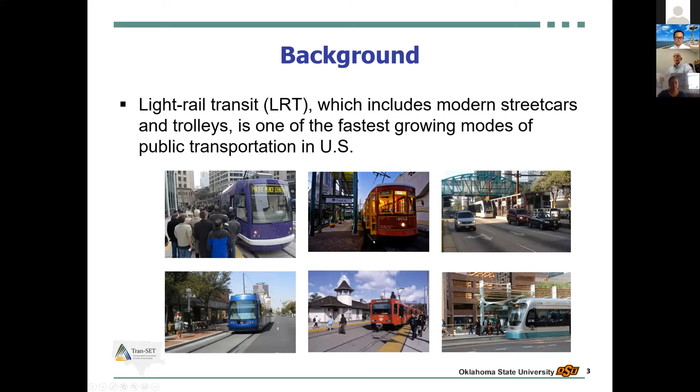The majority of light rail transit systems are fitted to existing corridors, urban or suburban corridors. By a corridor, I mean the right-of-way, say a street or a highway. So you take part of that roadway and allocate it for the light rail. That makes it very easy to introduce light rail. That's why they are very popular. You don't have to construct new rights-of-way, just a slight modification of existing rights-of-way.

The disadvantage is that the right-of-way will be shared most of the time, meaning more conflicts between the light rail vehicle, pedestrians, and other automobiles. You can have light rail in a semi-exclusive right-of-way, say with barriers that separate the light rail right-of-way from other users. But the majority are in shared right-of-way.

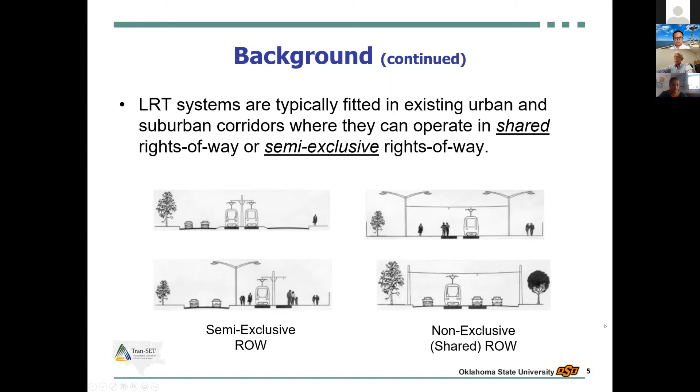The term VRUs, or vulnerable road users, refers to those most at risk in road traffic. Typically, pedestrians, cyclists, and electric scooter riders. Of course, there are motorcyclists as well. All of those are unprotected by an outside shield. If you are in your car, the body of the car protects the passengers and the driver. VRUs don't have that type of protection. In 2009, the World Health Organization reported that half of the 1.2 million transportation-related fatalities occurring each year concern vulnerable road users.

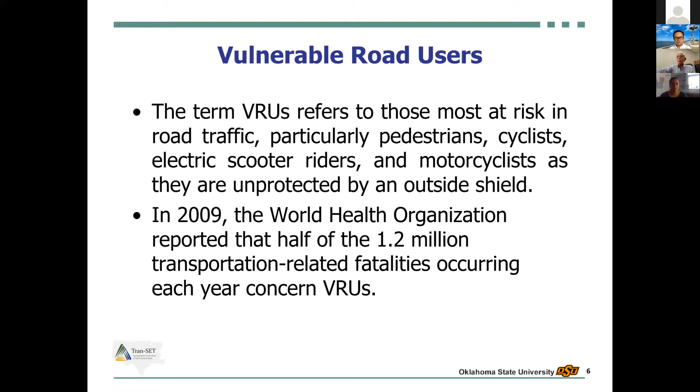VRUs are heterogeneous groups. We don't have one group we call VRUs. There are several groups that fit into what we call VRUs, okay? And these groups differ in their characteristics, travel habits, and behavioral patterns.

Among all VRU groups, the elderly, the disabled, and the children are more vulnerable than others because they display a certain amount of task incapability. For example, the elderly's walking speed is low, same thing for children. The elderly can't move their head right and left easily, okay?

Children are not aware of the risks involved, so they can engage in risky behaviors or actions. The disabled, of course, it's clear that they can't move fast, and they have to utilize certain devices in order to be able to navigate.

The motivation of this work is that operating light rail vehicles, which we are going to call LRV. LRT is light rail transit, LRV will be light rail vehicle. Operating light rail vehicles along shared or semi-exclusive rights-of-way introduces conflicts and increases the risk of collisions with vulnerable road users. These here are examples of, say here, just trespassing on the right-of-way for the light rail.

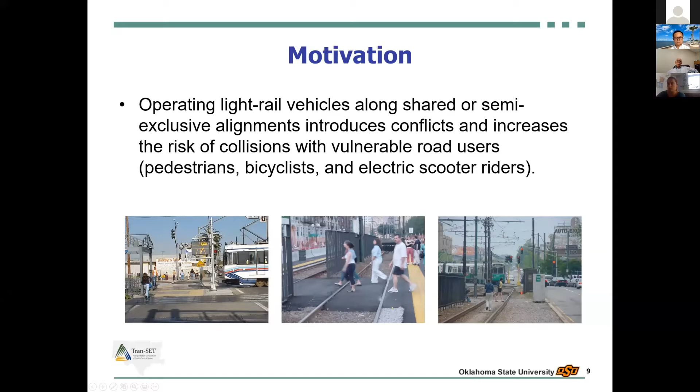Reducing collisions with vulnerable road users has been identified by FTA as the second item of their top 10 safety action items for improving rail transit safety. To develop effective safety treatments for VRUs, we have to understand the behavior of pedestrians, cyclists, and scooter riders along LRT alignments.

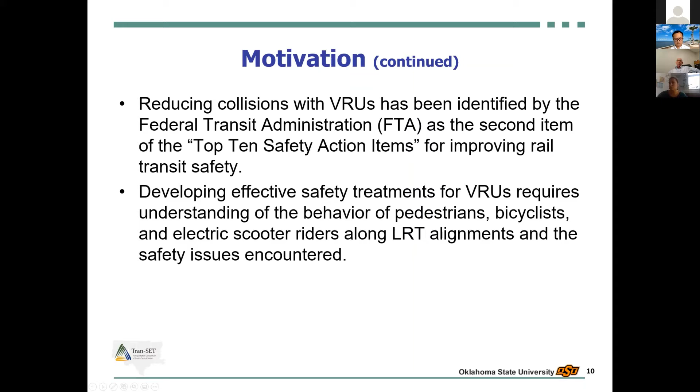The project involved surveying or evaluating the existing body of knowledge, synthesis of this information, and putting it in what we call a best practices resource guide and an accompanying PowerPoint training material. These materials will be used by light rail agencies. Okay, they can use it, say, in fairs, in schools, presentations at stations.

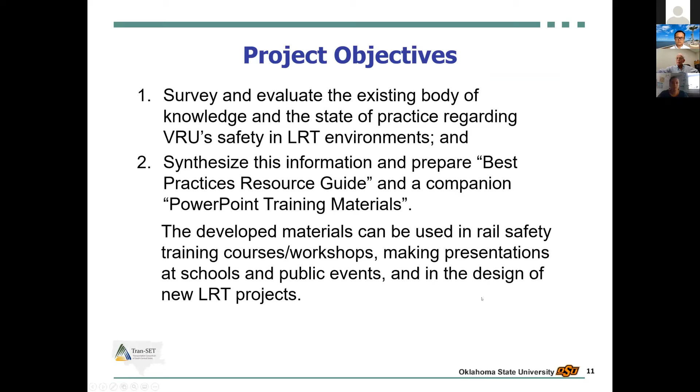They can use this information to educate and make the public aware of the risks that exist in light rail environments. They can also be used to train new employees coming to join the workforce in light rail. There were 8 tasks. All those tasks have already been accomplished. Right now, I am in the implementation phase, which is task 8.

For TCRP Report 17: trespassing, jaywalking, station and/or cross-street access. Report 69 lists limited sight distance at pedestrian crossings because of walls, devices, etc., and pedestrians darting across the tracks without looking.

Report 137, which had to do with audible devices, talks about inattention, confusion about the meaning of control devices, lack of appropriate physical separation between vulnerable road users and the light rail vehicle, risky behavior by pedestrians, lack of respect for controls, and operator error sometimes, or lack of information to the operator of the light rail vehicle.

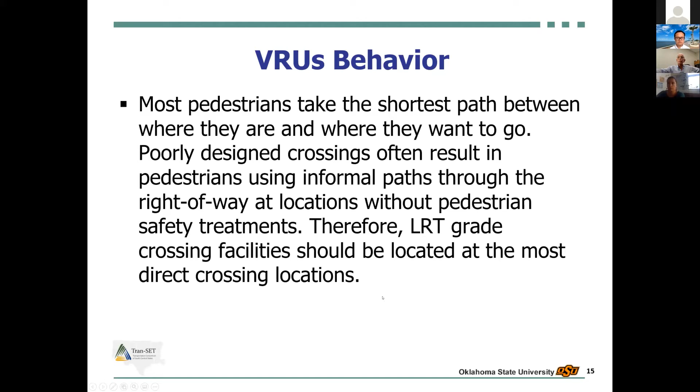LRT grade crossing facilities should be located at the most direct crossing locations. That's the first principle. Pedestrians are concerned about reaching the station before the train arrives and leaves. Therefore, they run. If they are late, they run. And of course, they are not looking at where the train is, and they don't understand the risk involved.

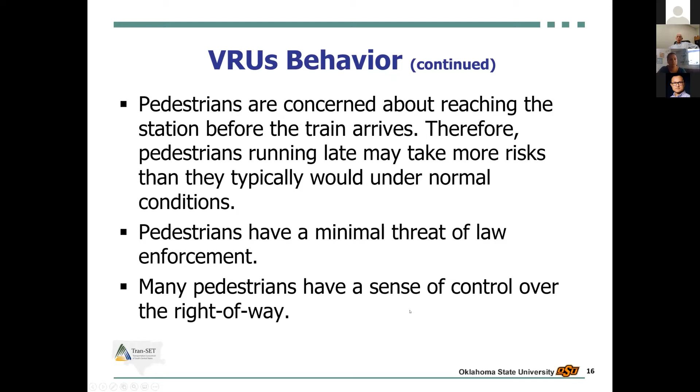Pedestrians have minimal understanding and evaluation of the threat of law enforcement. Many pedestrians have a sense that they control the right-of-way, and everybody else has to wait for them. Many pedestrians trespass into the right-of-way by jaywalking or crossing at locations that don't have appropriate crossing facilities. Pedestrians step into the LRT right-of-way to get around the people waiting at the station to avoid crowds.

Pedestrians ignore warning devices such as flashing lights and bells. Pedestrians tend to look down, they don't look up. So if you are posting a sign or something that's up, they need to raise their head. Most likely they are not looking at it.

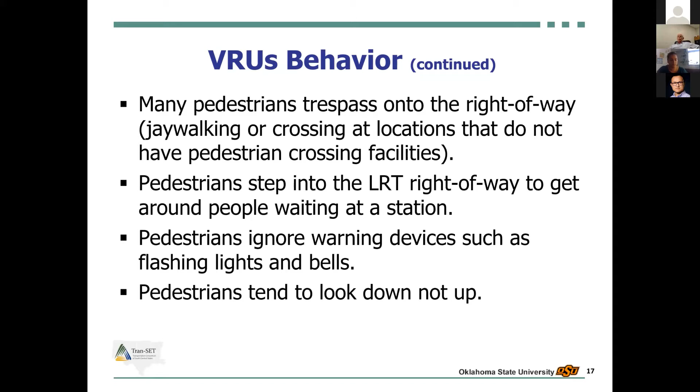Pedestrians cross the tracks after a train has left. If you have a train approaching from the right and another one approaching from the left, after the train from the right leaves, pedestrians are not aware that there's another one coming from the left. So again, the issue of the second train coming is a major problem.

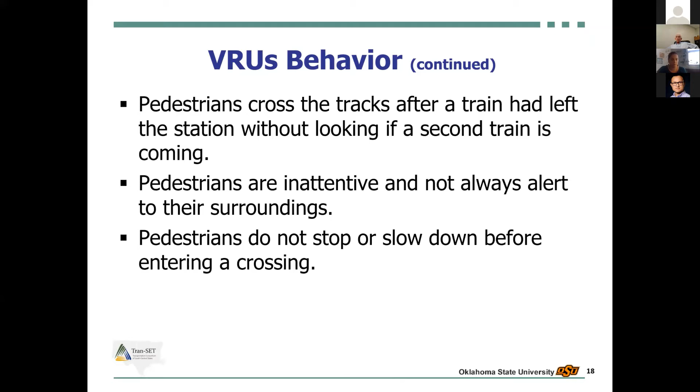Pedestrians are inattentive and not always alert to their surroundings. Again, the gadgets that we all use, just distractions. Pedestrians don't stop or slow down before entering a crossing. Pedestrians fail to look both ways at the crossing location. They stand too close to the tracks, so they occupy part of what we call the dynamic envelope, which should have been reserved only for the light rail vehicle.

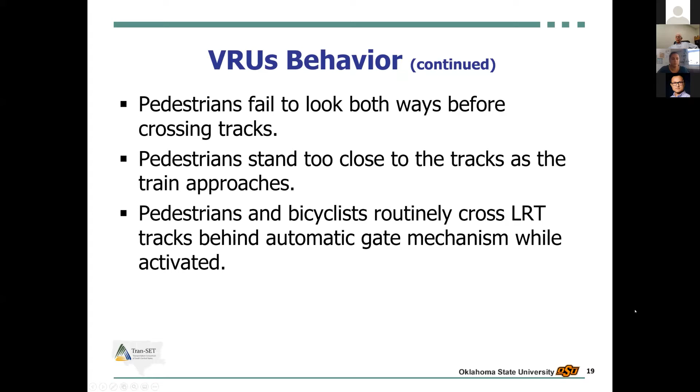Pedestrians and bicyclists routinely cross LRT tracks behind automatic gates. So although the gates are down, they still attempt to cross. The treatments available come from the published literature and other transit agencies, their safety folks. Available treatments include what we call engineering, sometimes referred to as physical treatments, education programs, either designed by national organizations like Operation Lifesaver or by individual transit agencies. So that's the education part. And finally, we have enforcement.

The engineering treatments, and again here I'm going to show a list, but if you need details and the pictures and discussion, I reserve that for later on if there is a need. Physical treatments can be either passive or active. Passive treatments are static. They don't change whether there is a train or there is no train, the same message, okay? Active physical treatments are dynamic. So the message itself can change, okay, to alert users about the approaching light rail vehicle.

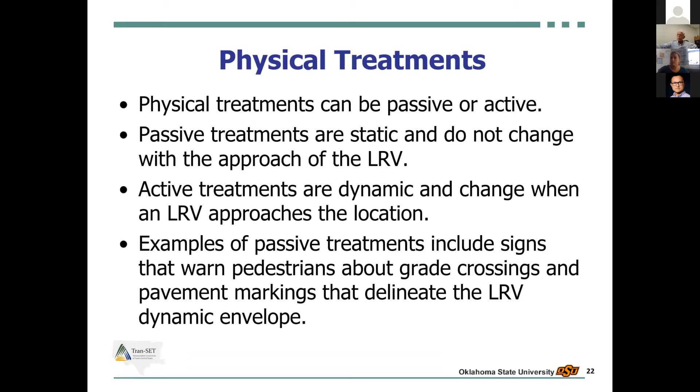Examples of passive treatments include static signs, like say railway crossing signs, and pavement markings that delineate the dynamic envelope. So these are static or passive types of treatments. Active treatments include what we call light rail vehicle activated. The approaching light rail vehicle will activate the active treatment. Okay. Examples include train coming type of icons, pedestrian auditory icons, and automatic pedestrian gates.

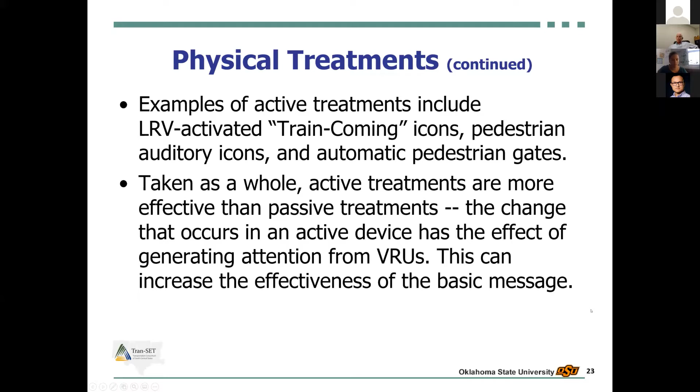Taken as a whole, active treatments, as we expect, are more effective than passive ones. The change that occurs in an active device has the effect of generating attention. This can increase the effectiveness of the basic message. Types of physical treatments include, as we said, passive signs, signals, and active warnings. Active warnings include active signs. Second train approaching treatments. Pedestrian gates.

Some gates are lowered, some gates close, and you have to push the gate to enter. So that will force you to stop when you are attempting to open the gate, so you can look left and right. Channelization, making sure that when the person is crossing the light rail crossing, they are going to be walking facing an oncoming train so they can see it. So the objective of channelization is to ensure that the vulnerable road user will see an approaching train.

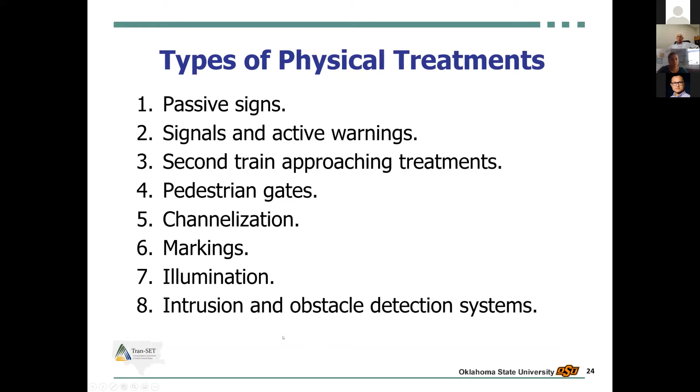Pavement markings, some of them are static, some of them are dynamic, like say those flashing lights in pavement markings. Illumination, making sure that the intersection is illuminated by external light. Of course, intrusion detection systems to detect if somebody is walking or somebody is attempting suicide, but these intrusion detection systems are not very common. Again, if somebody is interested in any of those, I have close to 30 slides or more that show details of that.

The second category of treatments involves education, and the third one involves law enforcement. Education programs: we're going to talk briefly about types of education programs. As I said, there are national programs and there are in-house programs designed by the light rail agency. Who are the target audience for education programs? Educational materials available, preparing the presenter and training them, public education venues for conducting the education, and evaluating the education programs to see their effectiveness or any improvement that can be made.

Dr. Ahmed, I'm sorry. Yes, sir. Just due to time constraints, we need to start wrapping up the presentation. Okay. Absolutely. Thank you for telling me.

Education programs: ongoing grade crossing public education programs. They are used at new start systems. New starts refer to new transit systems that are just starting in a city where they never had transit. And there are education programs that focus on trespassing and suicide. Target audience include people who live, work, or go to school close to the light rail tracks, high-risk locations and corridors based on crash histories, and then non-residents like tourists and business people who visit the city, so you can have some literature in hotels and conference places to tell them about the risks of light rail.

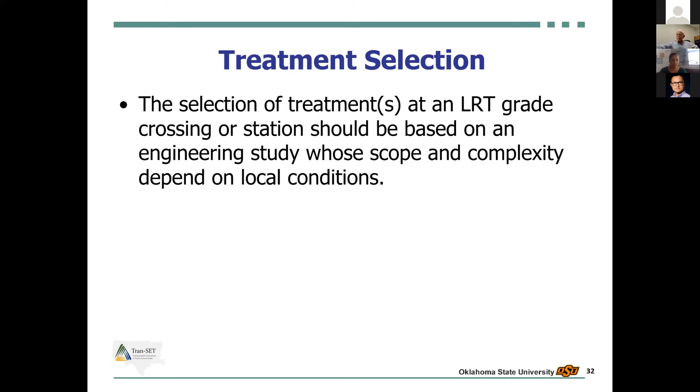Okay. Because of the difficulties in modifying established behaviors, the largest long-term safety impacts can be gained from education. Grade crossing safety research indicates that education and engineering should come first before enforcement. There are numerous treatments. Which ones to select in a given light rail transit agency? There is a decision tree here that one can go through that will guide the planner or the engineer as to which treatments will work best for that location.

The report for this project is about 160 pages. It involves lots of detail. So you can either read the report or ask me, whatever you like. I'll be available for questions at the end of the other presentations.

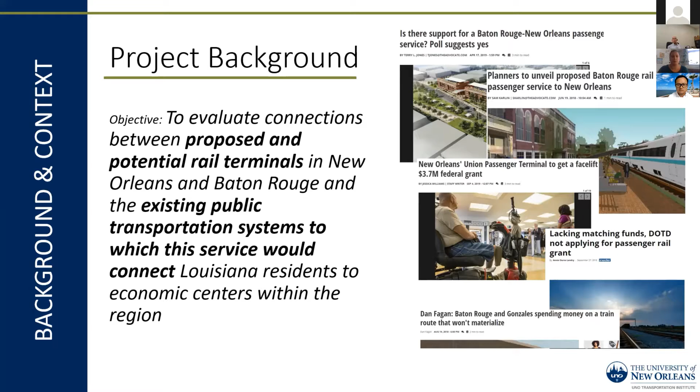So the goals of this project through Tran-SET were to compile and synthesize all the work that has been done around the proposed rail to date. It's been a little bit dormant in recent years, but it turned out this was really prescient timing to get this project in the pipeline because this conversation is now alive and well again, and we're able to contribute to that dialogue. The goal was to evaluate where the transportation networks are that would connect to the proposed rail stations and to collect data, updated and more nuanced data about who would potentially be riding and what they need in order to make the proposed passenger rail service a success.

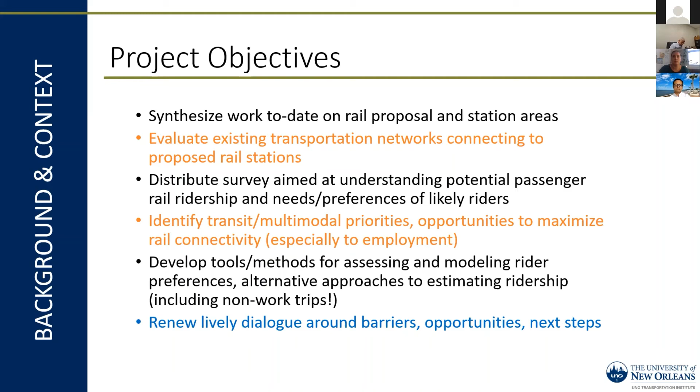So that involved figuring out what are the transit and the multimodal priorities, how can we make the rail service really connect to employment and other major destinations, and to start to develop tools for modeling what riders' preferences are, figure out how we can solve some of the gaps in estimating ridership, notably that previous estimates have all just been based on work trips, which is really limiting. And a sort of sub-objective here was that this was such a great opportunity to bring back this dialogue, talk to stakeholders, and get them really thinking about what the next steps are for this proposed plan.

Okay, so synthesizing what has been done before, we just took a look at all of the previous feasibilities that have been done. We recently completed a state rail plan in Louisiana. There have been a number of station area plans that have been developed, although there's a couple places where there's more work needed there. Looking at how current intercity transit connects through the region and what the local transit situation is, as well as robust pedestrian and bicycle planning activities that are in the works in some stage of development in several of the communities they would connect, and taking a look at how the previous ridership estimates come up relative to cost estimates and things.

And what we found here overall was that there was a really strong foundation in place to move this idea forward, and it was just kind of waiting for the right moment and opportunity with funding and political will. And we're in that moment, it turns out, with the new infrastructure bill, as well as a merger of Canadian Pacific and Kansas City Southern that own the current freight rail lines within this corridor, who have signaled their willingness to move forward. With our current state and federal administrations, it now really seems like the time to bring this conversation back to the fore.

So to do our part to contribute to this, our data collection was based on a statewide survey, but focused on the Southeast Louisiana region that is impacted. Dr. Tian will talk a little bit more about the specifics of this in a moment, but the general gist of it was we did an online survey that included a discrete choice experiment to start to get at riders' preferences and sensitivities, as well as to some extent understanding how COVID may have impacted things. We had also planned at the time an intercept survey for people who were currently taking the bus in the corridor. We had to cancel that due to COVID as well. And then the goal was to integrate this with spatial data and the built environment to model potential areas of opportunity and things that we want to be aware of.

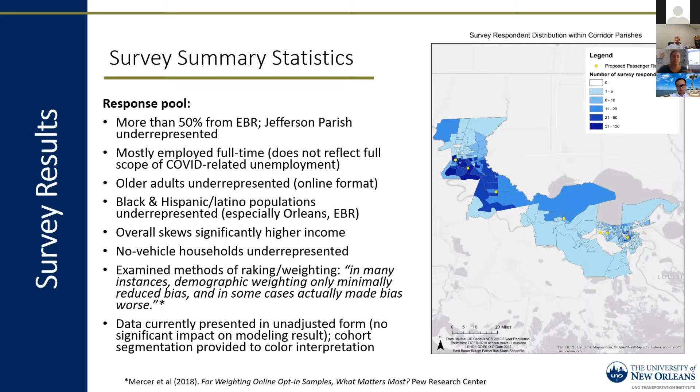So just to hit a few highlights of the survey results, and the final report is published if anybody wants to dive a little bit deeper into it at any point. Some of the main findings were that this region is already more multimodal than we consider it to be. Even though we have low rates of walking, bicycling, and transit commuting, when we asked people if they commute by multiple modes ever, not most of the time like the American Community Survey says, but ever, we actually found that a lot of people do walk, bike, take transit, carpool some of the time.

We also found that people in this region travel back and forth a lot. Over a quarter travel across parishes on a weekly basis or more. Half or more travel regionally at least a few times a month. So there's plenty of activity within this corridor from parish to parish of people commuting or making other trips within the region. We also found out, and this one is definitely an important one for service design for the proposed passenger rail, that the reason people are traveling is mostly not work.

Work is important. About half of people travel for work some of the time, but the much bigger reasons are social and recreational and cultural reasons that really drive a lot of activity in this region. We're talking about Saints and LSU and Mardi Gras and festival season and all the like. We also found that if we're focusing a service design only around 9 to 5 commuters on weekdays and ignoring the weekends, we're missing most of the opportunity here, because that is where so many people are making those trips, on the weekends or on both the weekdays and the weekends.

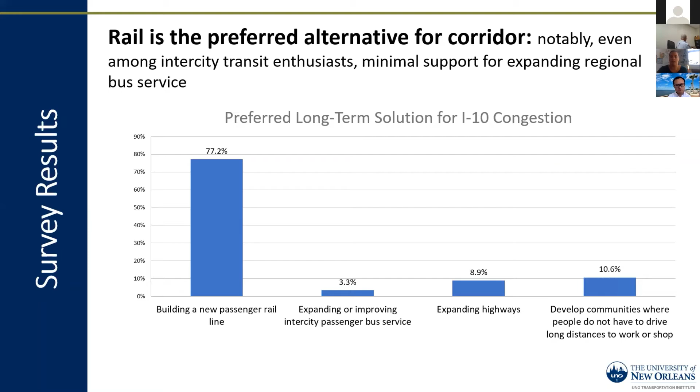So that makes sense. We also found that if you ask people how should we work on solving I-10 congestion, which is the interstate that goes through this corridor, the overwhelming percentage of them say build the rail line, much more than expanding bus service or expanding the highways or changing our land use patterns so that people don't have to commute quite so much.

Some of our overall findings about multimodal connectivity are that we have some gaps to fill. We definitely are lacking in some areas. Local transit in particular, we found really low perceptions of quality and access. People don't think that transit that serves their local community is that great. In some cases within this corridor, there is none, so that makes sense. Bicycle networks are also limited. We can definitely see that other than a little bit in New Orleans, bicycling is not really seen as a viable option for how they would connect through their community at this point.

And the pedestrian environment, walking is maybe the most concerning of all, where in a lot of the region, we found that most people said that walking is very difficult, other than in urban New Orleans itself. It's really hard to walk to anywhere. And that is reflected in how people state that they would expect to get to the stations. Most people overwhelmingly said they would drive to the station and take the rail from there. So that's not surprising. We did see that there was the greatest support for multimodal options in New Orleans, where that is currently the easiest. So that is an area where there is opportunity to build.

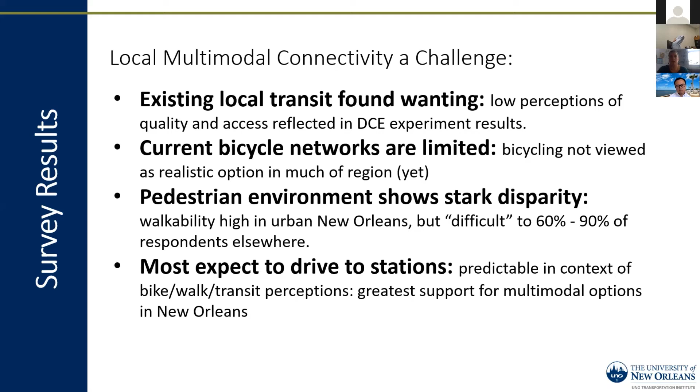We also found that interest in multimodal travel is growing. We had some questions in there about what did you do before COVID? What are you doing now during COVID? What do you expect to do after COVID? And we found that there was a notable increase in the amount of people who say they would like to use other options in the future.

And also a good number of people who expect that at least some of the time, they're still going to be working from home. So we have to incorporate that into our transportation planning. There are still some concerns about what happens after COVID, if we can ever even be said to be after COVID at some point. But for the most part, over half are saying they're not really anticipating any changes in how much they would use transit or consider it. And some even said they're more likely to use transit in the future for whatever reason.

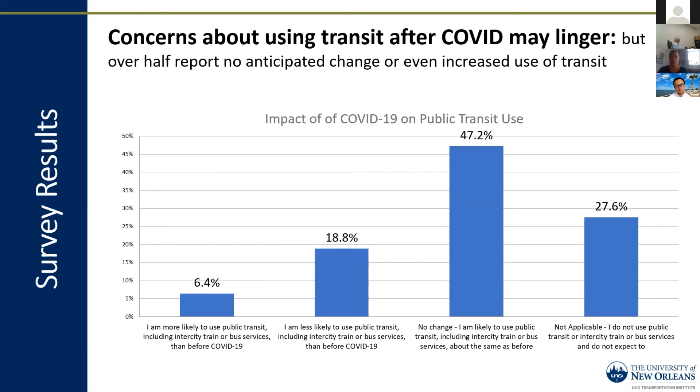And along those lines, most people expect to return basically to whatever their normal was pre-pandemic, with some notable changes like the more active trips, maybe less transit use, and definitely more work from home. Okay, I'll turn it over to Guang for a minute to talk about the more robust piece of modeling that we embedded in this survey to start to get at some quantifiable results.

Right. So for this part of the survey, we have a discrete choice experiment. What we really want to figure out is, for different configurations of this corridor rail transit, how to maximize the ridership, catch as many people as possible that would use the rail. I'm not going to talk details about these methods. It has been used a lot in studying people's preferred behaviors, and particularly in this sets, with 6 attributes and different levels for each attribute.

And in the survey, the respondents get a pair of choices. They just choose one over the other. Of course, between the two choices, there are some trade-offs, like how much it will cost and how long it will take, right? And the balance is to try to find what are really the configurations that people prefer if this corridor will ever be built. And next slide.

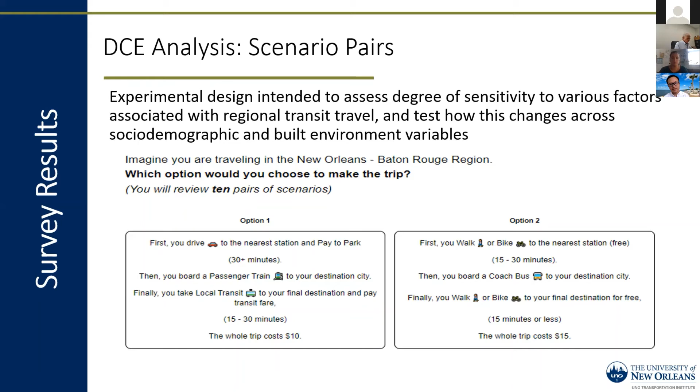And also, how long would they prefer to take from their final destination to the train, and also the cost of the whole trip, and the different combinations of those attributes. And then we used the multi-level logit modeling to try to figure out three things. We want to figure out among those different configurations of the train, what are people's preferences, and second, we want to know, do those preferences differ from people to people, meaning whether their individual characteristics play a role there, like their age, their income level, or those things.

And then the last is the built environment, where, as Tara mentioned, we were able to geocode them, and how where people live impacts their preferences. So we try to figure out those three things. And next. And so our first model is to model the attributes to see which one people prefer. There are a lot of details there. I think we're running out of time. So briefly,

people prefer to drive from their home to the station, or from the final station to their destination. And they want a quick travel time. They want lower fares, and those are not surprising. But they strongly prefer train over bus between those two places. That's very interesting. And also, we found that at their final destination, people are open to take transit from the station to their final destination. So that gave us a clue that, as the whole purpose of this study, the connection between those proposed stations and the local communities would be key to making this whole corridor successful. And next.

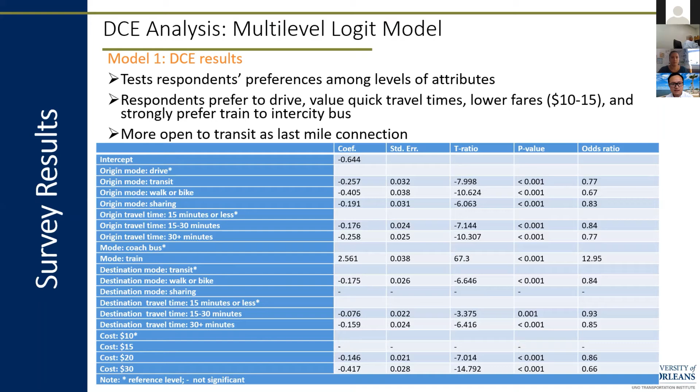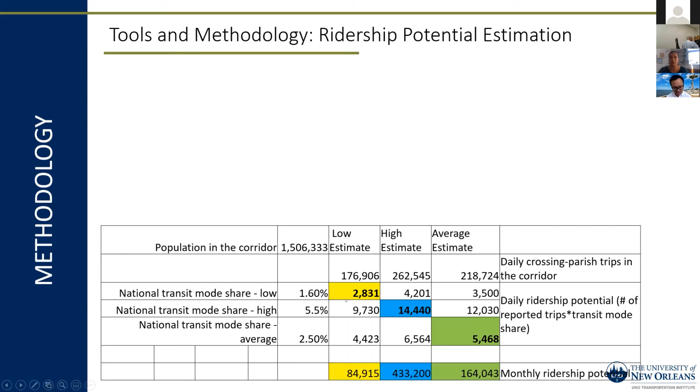Thanks so much. Yeah, so I think to highlight there, this is the supply side: if we had unlimited train service, there's potentially more demand than any of the previous estimates were showing us. Oh, that's where the rest of the content was. Next slide. We're looking at more than just the commute trips, because we found there are so many people who are interested in making other trips by train. So this represents a conceptual model of, if we had available, fast, frequent, reliable rail service, what could we capture? And those numbers are, I think, pretty significant.

Okay, so just to wrap us up here, the summary findings are that we have really strong groundwork in much of the region. Since the last feasibility study for this project was done in 2014, the local governments have picked up the ball and been slowly developing their station area plans, figuring out how they would integrate that into their transportation networks. It's been happening, with the minor exception of one of our parishes where they just haven't done that yet. And so this project was able to really revive that conversation and say, let's start thinking about this.

The time is now. We know from the survey results that we have a lot of interest in multimodal travel, but right now people aren't really thinking about that as how they would access the train. They're interested in walking and bicycling, but if they're thinking about how they would catch a train to Baton Rouge or to New Orleans, they assume they would just drive there. There is some preliminary indication that COVID has increased a lot of folks' exposure to walking and bicycling while things were shut down. We saw from other research, our trails and recreational activity was off the charts for a period of time. And we know that for higher income workers, more telecommuting is here to stay. So that impacts. We saw really strong support.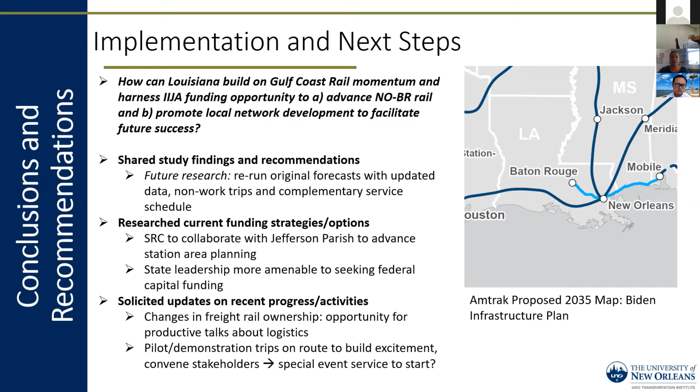And then, of course, we also wanted to talk about where are the other barriers and opportunities. At the time, this corridor was in the process of changing ownership, as somebody else bought it, and now there's a merger happening, which created the opportunity to really get into the weeds about what are the logistics of making this happen. And one thing that emerged from these conversations was the idea that the rail line is already in place, it's just not quite set up for passenger service yet. So maybe what we need are some pilot and demonstration trips to really start to make it feel real to people, and potentially special event service as a way to slow roll the introduction of passenger rail.

And there's another missing piece on this one. Let's see. There it is.

Okay, so then the new news added just yesterday. There were a flurry of news articles saying that the Canadian Pacific that is merging right now has committed, in quotes, to provide this passenger service. And they're saying that even without capacity expansions, although some speed and safety improvements are still needed, they are committed to the idea of at least one round trip per day for now. So that is really encouraging. That's much more than we've had previously from freight partners to really commit to this concept and to say, this is a thing that we are willing to help make happen.

We know we have the governor's support talking about not just this corridor, but the corridor from New Orleans along the Gulf Coast, as well as even a new potential link up in North Louisiana. And so we would like to see some of the work that we did in this study potentially be replicated and shared in other areas that are looking at similar concepts.

But of course, there's still plenty of concerns. Looking at our survey results, I have questions about who one round trip per day would really be able to serve relative to what the demands of the residents of this region look like. But it's a very encouraging start and something that we hope to see build. And I'm happy to have been able to be engaged in this conversation during this period. So I think that's it, and we will take questions at the end following the last presentation.

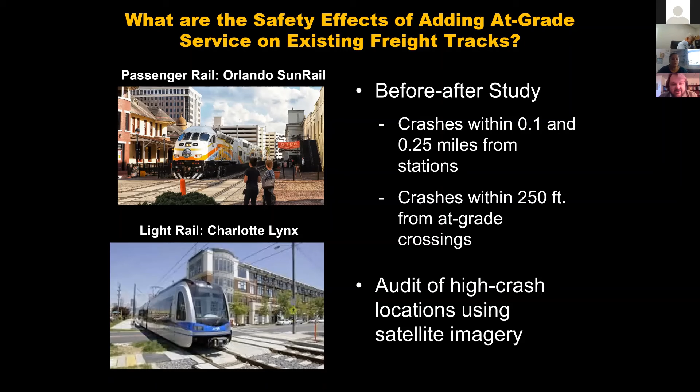And we combined that with audits, safety audits of high crash locations to see if we can understand the nature of these crashes. All right, so the first one's Orlando SunRail, which opened in 2014. We used 3 years of data before that to account for regression to the mean, 3 years of data afterwards to figure out how crashes might have changed both around the stations and then along the corridors themselves, right?

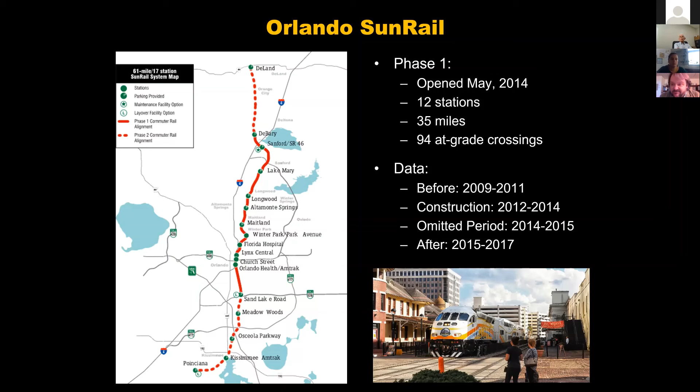So it's not just what's going on at the station, but when there's an at-grade intersection where the rail occurs at grade, what are the safety impacts of that? So we looked at those too. We looked at different dimensions, but I'm going to screen some of that out. The real impact for stations is that just 1/10 of a mile around it, not even a 1/4 mile. Most of those changes and crashes are occurring within 0.1 miles, right? And in the case of SunRail, you had a more than doubling of crashes within 0.1 miles of that.

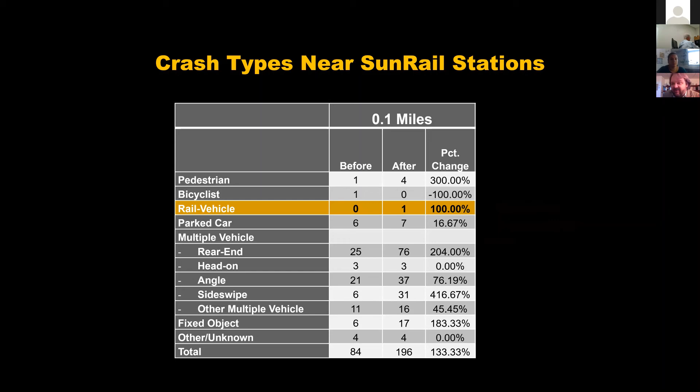Right now, we think that these are mostly rail vehicle collisions, and we went from 0 to 1 in this area. Not a big deal, even though 100% is a big percent, the numbers, one person got hit. That's not a huge safety problem, right? But what we saw when we look at other crashes is profound changes. 1 pedestrian to 4, again, not a huge deal. But I want you to pay attention to these multiple vehicle crashes.

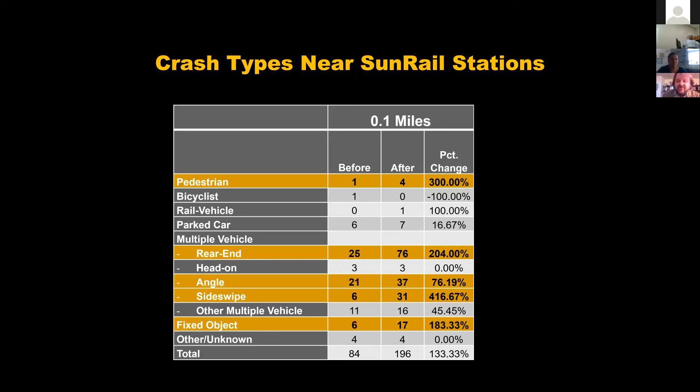Rear end collisions up 204%. Angle collisions, which are some of our most severe collisions, up 76%, side swipes where one car bangs into another, 400%, and then fixed object collisions where somebody runs into a pole, right, 183%, right? So the safety impact is not just the train running into things. That's actually pretty infrequent. It's all these other changes that are going on around there.

I can't see my slide quite on this. Let me move this. I'm looking at myself, which is far less interesting than what I'm trying to present to you guys.

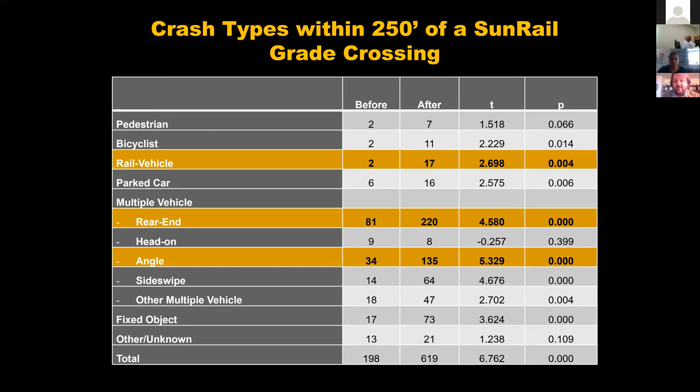All right. Statistically significant, right? So these are the significant differences. Rear end collisions and angle collisions. And that angle collision should be a real cause for concern. All right. So where are rear end collisions happening? We did our audit. Most of them concentrate at 4 locations. And interestingly, they all have the same characteristics, right?

This is where one car rear ends into another. Fortunately, these tend not to be severe. Where we have these problems is when we have rail tracks located more than 200 feet from the intersection. And the reason that's the case is once you hit 200 feet, the Manual on Uniform Traffic Control Devices doesn't require you to coordinate the gate closures with the adjacent signal.

Now, the driver progressing through the corridor is paying attention to the signal, not the gate closure sign, right? If that green ball is coming up on the light, you approach it at full speed, they're not prepared to stop. The first vehicle stops when the gates come down, the other person's just automating the driving task, right? They're not expecting the person in front of them to stop, boom, rear end collision, right?

So this is an issue that very likely we could resolve by simply expanding the intersection area of influence. When there are rail tracks located adjacent to a signalized intersection, go beyond 200 feet, right? It might be 300, we need to do a sensitivity analysis, right? But where there's little expectancy for a gate closure, but a gate closure exists, you need to coordinate those signals so that the signal that the lead driver is paying attention to is providing advance notice for what's about to happen, all right?

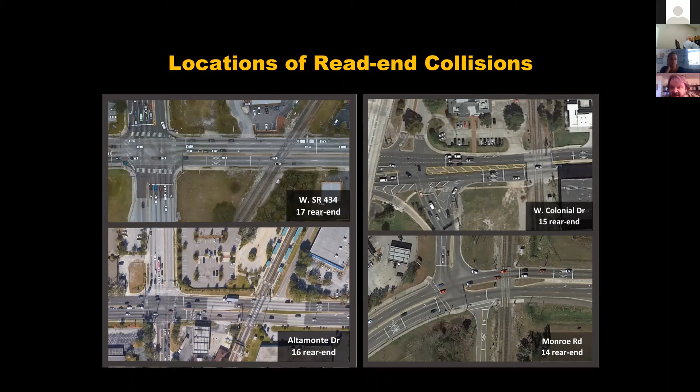Yeah, that's the MUTCD, won't go into that. Angle collisions also had a consistent pattern, right? This is when you had a 4-way intersection and then the rail tracks located along one of the things. So what we've now done is we've created a more complex intersection with rails coming through part way.

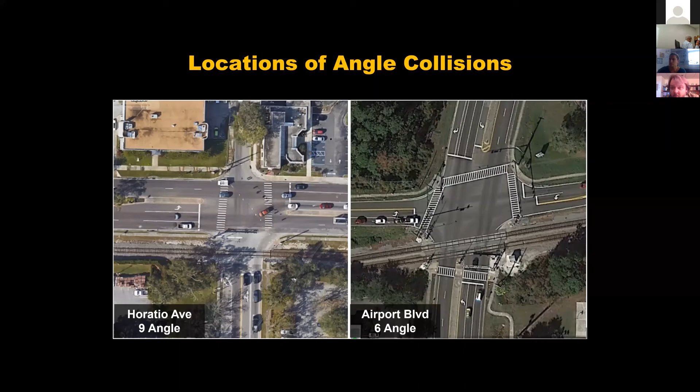And so what that means is you've got on these intersections here, particularly on the left turn, vehicles will pull out into the intersection, look to queue, right? They're not going to get that clearance. The gate comes down, you pull out, you get into the angle collision. Likewise, there are going to be sight distance issues that occur here that'll cause that to happen, right? But a clear pattern for where these angle collisions are a problem. It's this specific configuration,

right? And the solution to that is, we don't like to do this for operations, but it's protected only left turn. Get rid of that permitted left turn. MUTCD allows you to keep, they say we recommend you consider it, but lets you keep that permitted left turn. And when you do your operational analyses, that permitted left turn is always going to look good. It's always going to outperform the protected left turn. So there's a real reluctance to just require people to stop at the stop bar before they make that left. But if you want to address the safety issue, that's the solution to that problem.

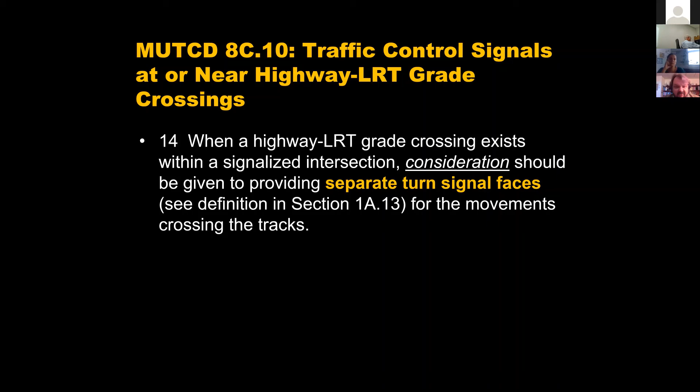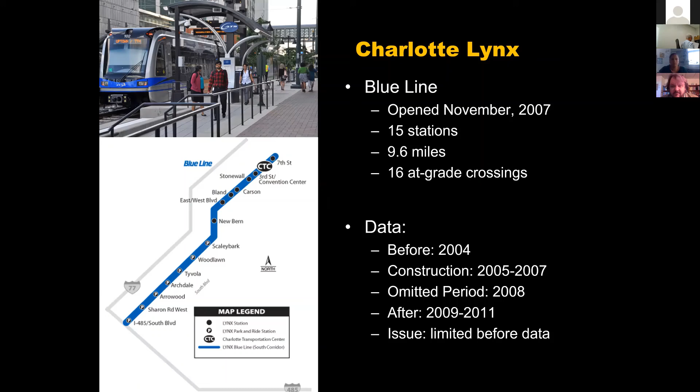Rail vehicle, I won't get into that for time. All right, Charlotte LYNX was a little more problematic because the before data was no good. So we changed our model, right? The before data for Orlando was good. We used Charlotte simply to confirm, see if we could confirm what we were seeing for Orlando, right? So we had to dump the before period data. But if the things we're seeing in Orlando are the case, it should also be reflected in the after period for Charlotte. All right, so that's what we did.

And in fact, that's what we see, the same kind of problems here. Rear end collisions, angle collisions are the big ones, right? The rail vehicle, not a particularly big problem here. It's rear end and angle collisions. So it's multiple vehicle collisions near an intersection, all right? Same thing here. And when we look at where these, almost all of these for LYNX occurred at 4 locations, right? And it's exactly the same configuration we saw before. We've got the rail tracks located adjacent to an intersecting street. All of the crashes are occurring here, right?

So this problem is in particular, and it's compounded by something we do when we put these things in. SunRail did it, and both of these systems do it. When you've got freight lines, you tend to have a single track, and then the trains are able to pass by something known as a passing loop, which we see here. So one train pulls off to the side, the other passes, and it comes out. Now, for operational purposes, if you've got passenger rail, passenger transit occurring on here, you don't want that passing loop because it stops the opposite direction of traffic.

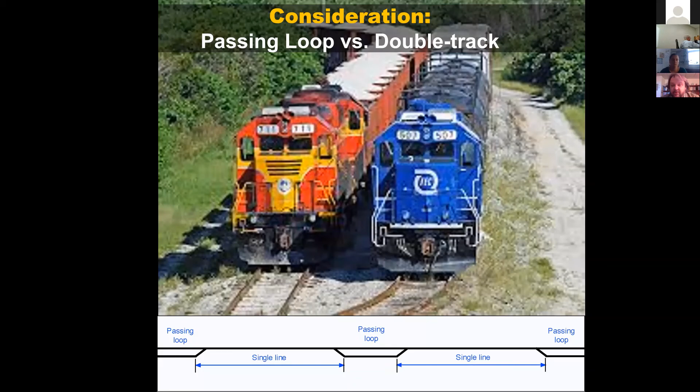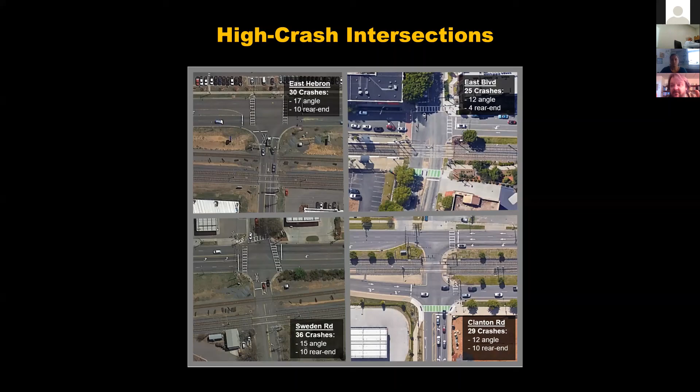So what's done in all cases is we double track, right? So instead of the single track that causes the closure, you've now got a second track. That expands that intersection area of influence there, right? So it makes it more difficult for the crossing vehicle to get through it. So that's the issue going on with a lot of these things, right?

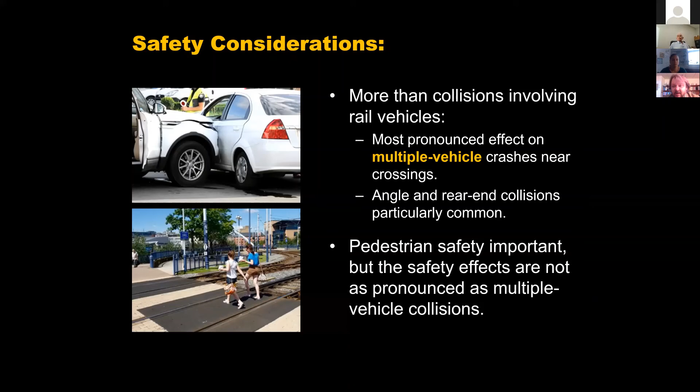So just to wrap this up real quick, the issue here, even though we think about rail vehicle collisions, it's not that. It's multiple vehicle collisions. Peds go up and bikes go up too, but it's really multiple vehicles that are the problem, and we don't address these well at all, right? The things we need to look at: Manual on Uniform Traffic Control Devices, policies on traffic signal preemption, right? When you've got the crossings, the use of left turns, right? Right now, there's a little too much discretion permitted in here, and we look at what people are doing. These mistakes are getting people injured and killed.